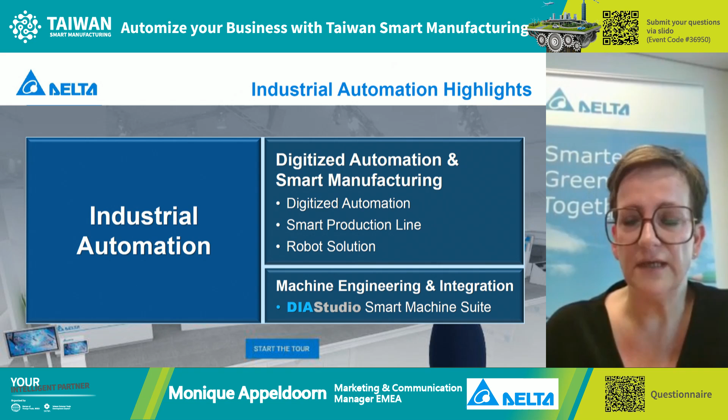The focus of industrial automation this year is digitized automation, smart manufacturing, and machine engineering and integration.

In digitized automation, Delta is proud to offer a complete management software package that allows you to manage your factory floors and be a smart manufacturer in the ever-changing world today.

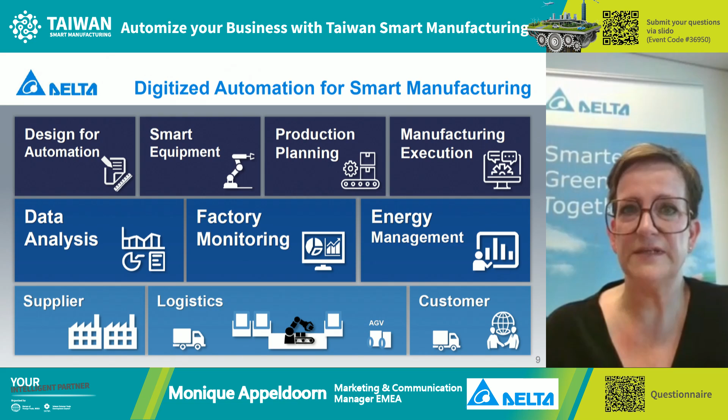As you can see here, we have design for automation, smart equipment, production planning, and manufacturing execution. So basically, from the factory floor all the way up to the management of the factory, we can help you manage this.

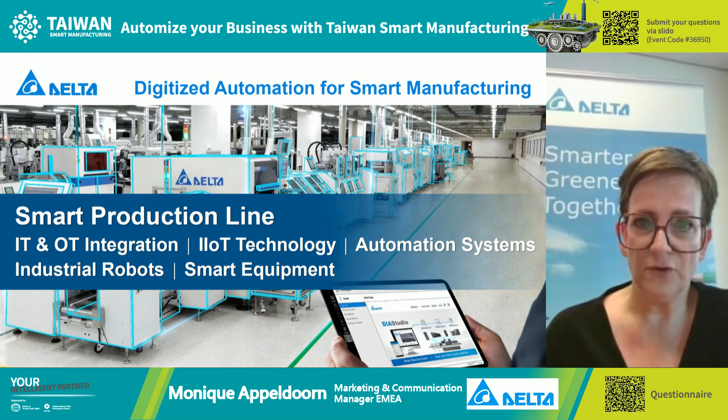In Digitized for Smart Manufacturing, we offer smart production lines, industrial Internet of Things, automation systems, industrial robots, and smart equipment.

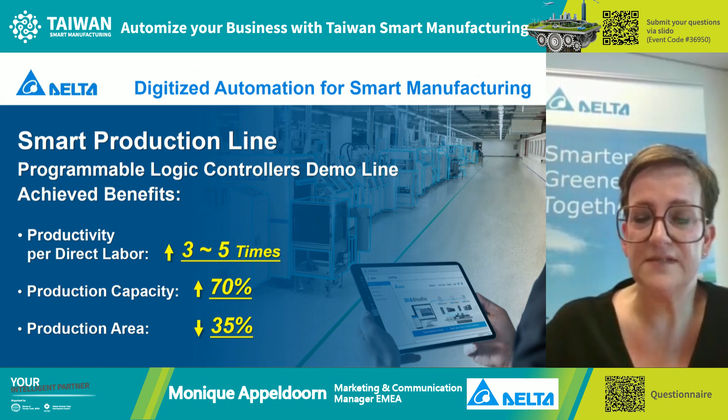In smart production line, we are looking at the smart production line in the Wujiang factory floor. This is one of our own factories in China, where we've implemented our software as well as our hardware to make a smart production line. By doing this, we've increased productivity per direct labor 3 to 5 times, increased production capacity up to 70%, and decreased the production area.

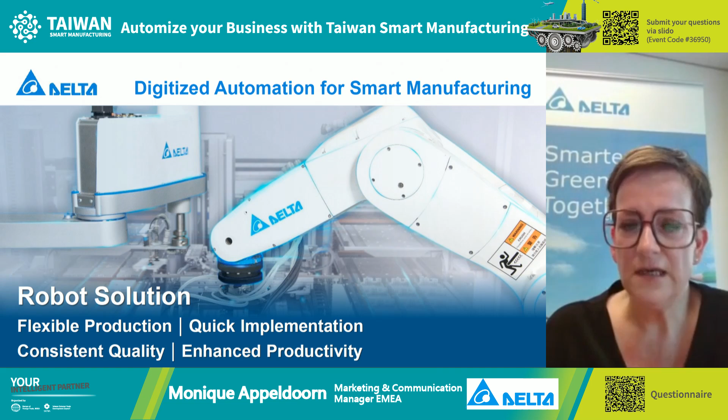Of course, in smart manufacturing, you cannot think of smart manufacturing without robotics today. What are the advantages of robotics? It's flexible production, quick implementation, consistent quality, and enhanced productivity.

The last focus that we have at Hanover Messe this year will be the launch of the DIA Studio Smart Machine Suite. It consists of 3 packets of software: DIA Selector, DIA Designer, and DIA Screen. The big benefits of the Smart Machine Suite are reduced commissioning time and faster integration, and basically you can tell your hardware what you want it to do for your machine.

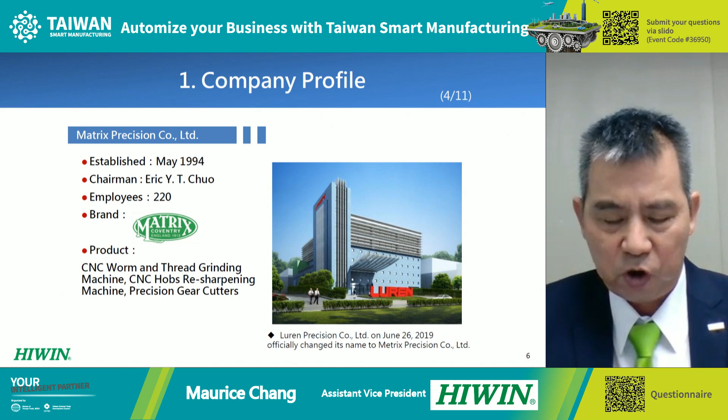All HIWIN's factories are located in Taiwan. We have 7 factories, with all key components being manufactured in Taiwan.

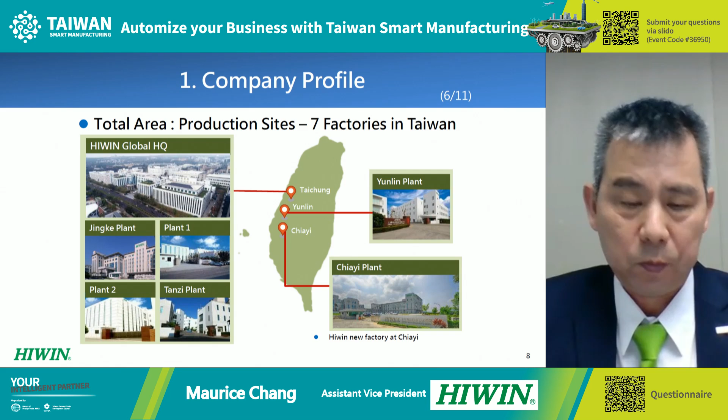HIWIN also has a global network, having 12 subsidiaries and distribution channels in more than 50 countries globally.

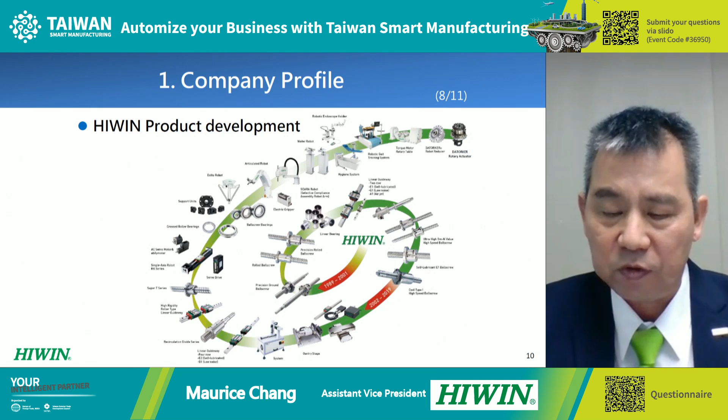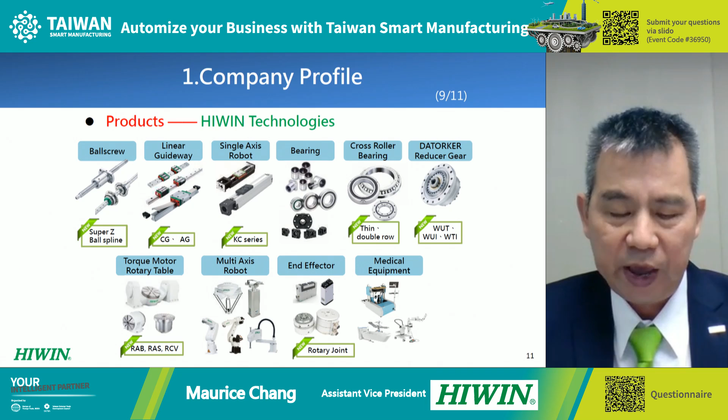Here you can see the full range of HIWIN's products, which includes ball screws, linear guideways, single-axis robots, bearings, cross-roller bearings, DATORKER gear reducers, torque motor rotary tables, multi-axis robots, end effectors, and medical robots.

HIWIN Mikrosystem's range is displayed here. It includes AC servo motors, drives, linear motor stages, torque motors, goniometer stages, Abilymotors, position measuring systems, and linear actuators.

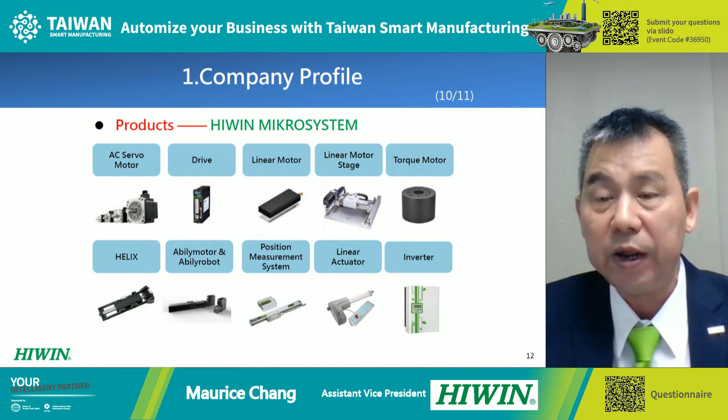Some of our best achievements include HIWIN being currently #2 globally in both ball screw and linear guideway manufacturing. We are also one of only 2 manufacturers in Asia for torque motors, and the only company that combines motion control components with electrical components to complete total solutions for our customers. HIWIN is also the largest semiconductor coordinate robot supplier, and the top 3 semiconductor equipment manufacturers in the world are HIWIN's key customers.

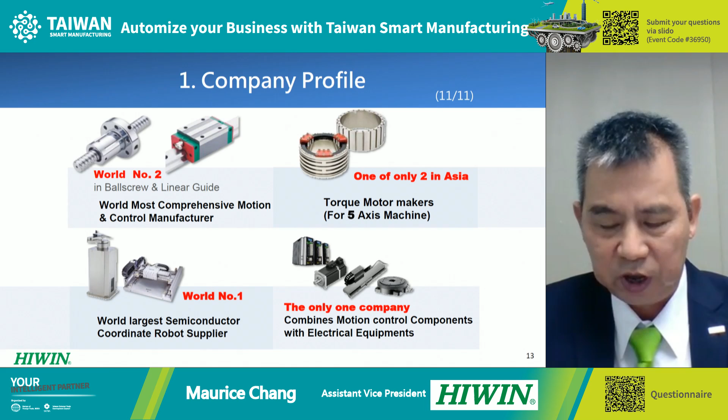HIWIN's outstanding performance has been recognized by the global media as we ranked number 16 in the Nikkei Business Asia 300 Power Performers in 2019. HIWIN was also ranked in Forbes Asia's 200 Best Under A Billion company listing last year.

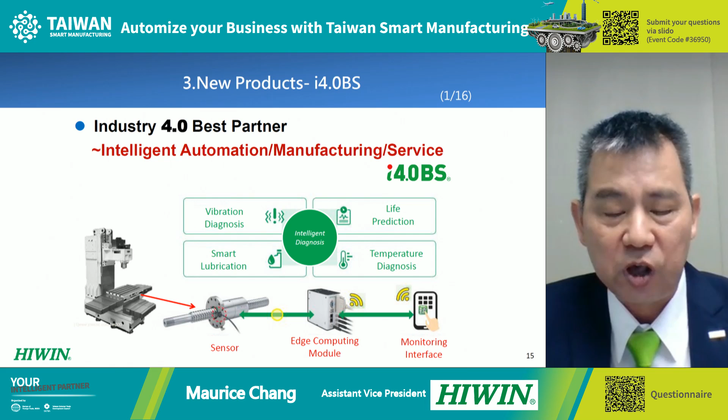HIWIN has a constant focus on smart manufacturing, and we have collaborated with universities in Taiwan and abroad to develop the next generation i4.0 ball screw. With a specially developed sensor and edge computing technology, the i4.0 ball screw can pre-diagnose the vibration, lubrication, temperature, and preload of the ball screw in precision machinery. It is also capable of sending feedback to operators and managers by computer or smartphone to prevent unexpected machine shutdown, thereby improving productivity and reliability.

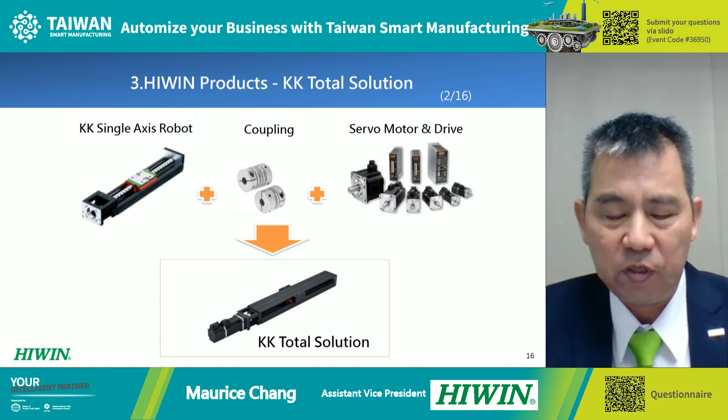Next, we will be introducing some of HIWIN's total solution products, which are the core strengths and add value to our customers. The KK total solution consists of our KK single-axis robot, coupling, servo motor, and drive. Customers receive total solutions for their automation—they just need to plug and play instead of looking for different suppliers for different parts and having the hassle of installing them themselves.

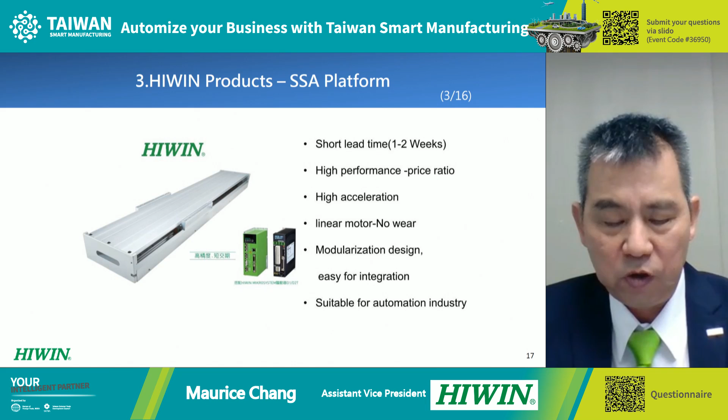This page shows the SSA platform, which is a total solution stage using our linear motor technology. It offers high speed and high accuracy.

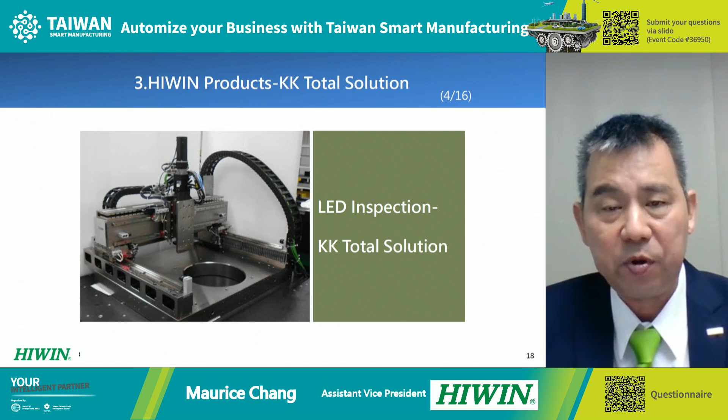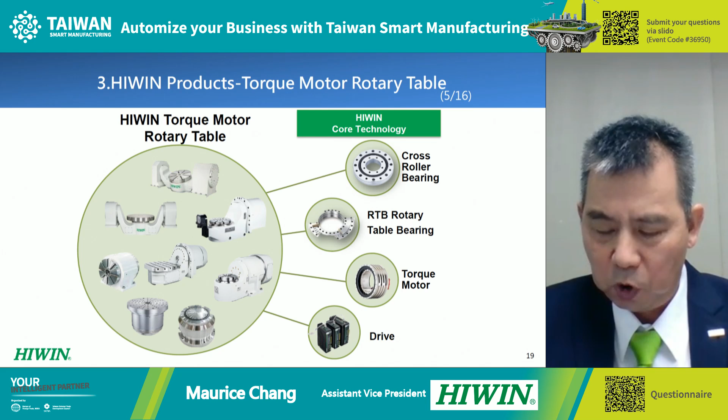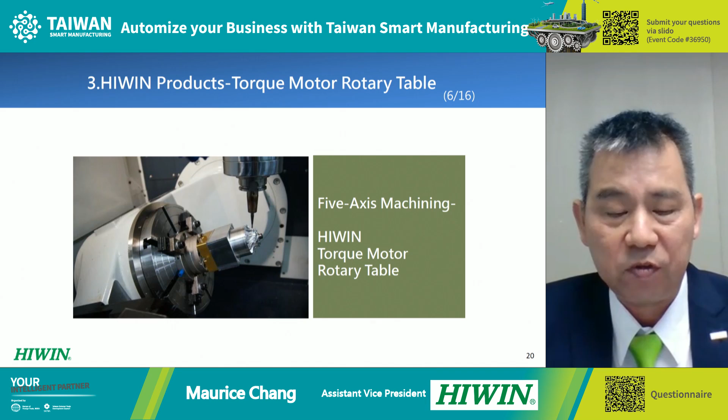This is an example of a precision 5-axis machine using HIWIN's torque motor rotary table to produce turbines for automotive parts. The torque motor rotary table also helps customers increase the machine's value-added function, upgrading from a 3-axis machine to 4 or 5-axis machines. This enables the production of more complicated and more precise components by a single machine.

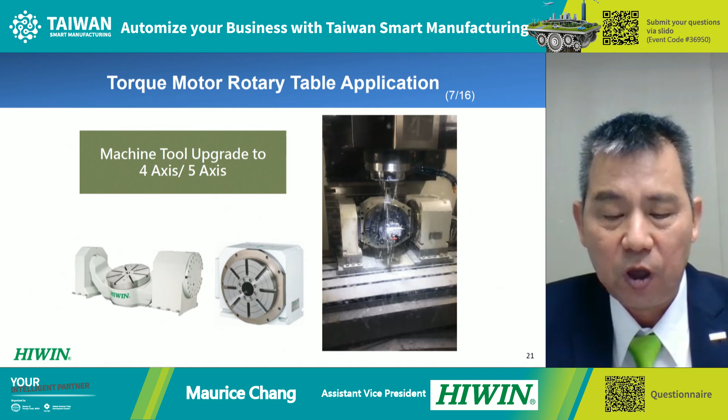Moving on to our robots, HIWIN has a wide range of robots, from the articulated robot to the SCARA robot for industry applications, to the Delta robot mainly used in the food and pharmaceutical industries, to wafer robots used in semiconductor industries. All the major components of the robots are manufactured solely by HIWIN.

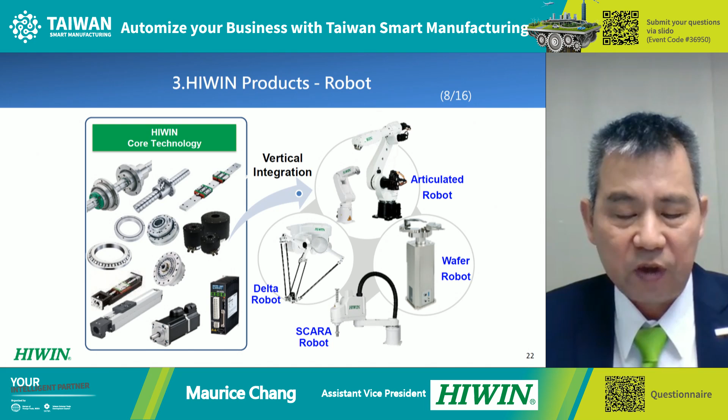Here is HIWIN's Delta robot installed for automatic labeling and pick and place in the food industry.

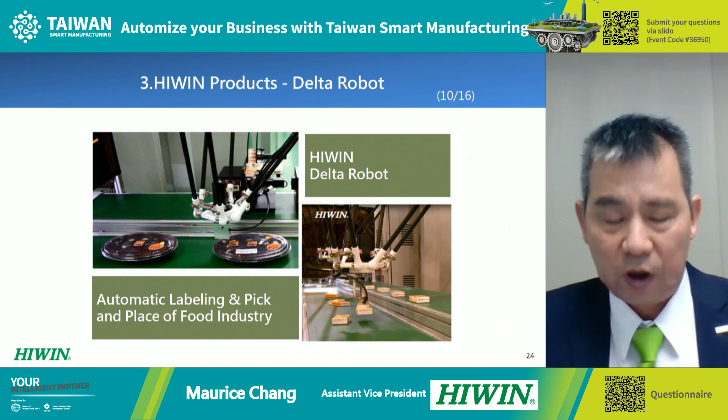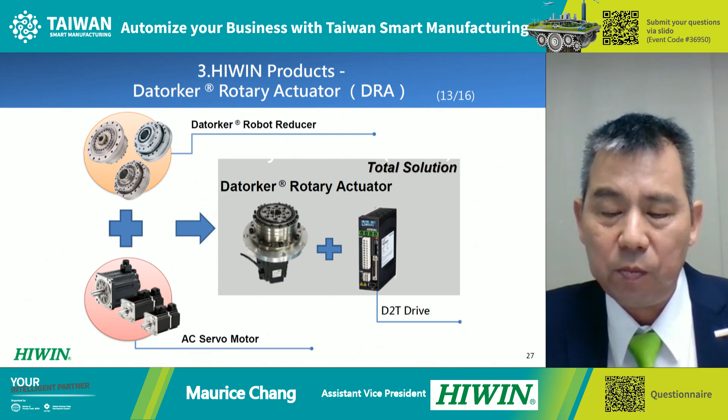The latest total solution product from HIWIN is the DRA Datorker rotary actuator. The Datorker is a high precision and compact gear reducer with a strong gear reduction ratio used in robots, high precision machinery, and indexing applications. Along with the servo motor and our D2T drive, we can offer customers an integrated precision product which, again, customers just need to plug and play.

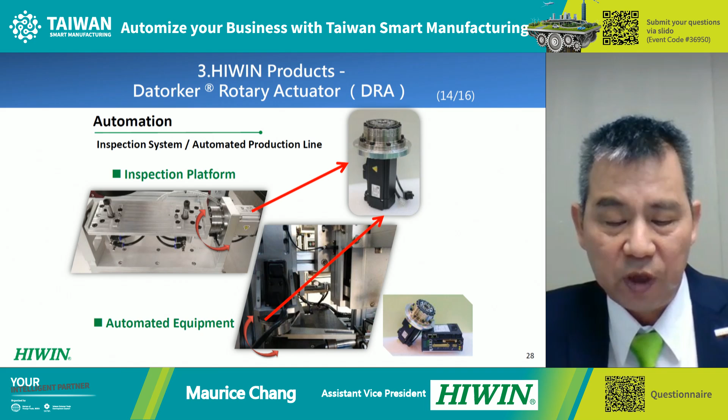Here you can see the applications of our DRA in in-process inspection platforms as well as automatic equipment.

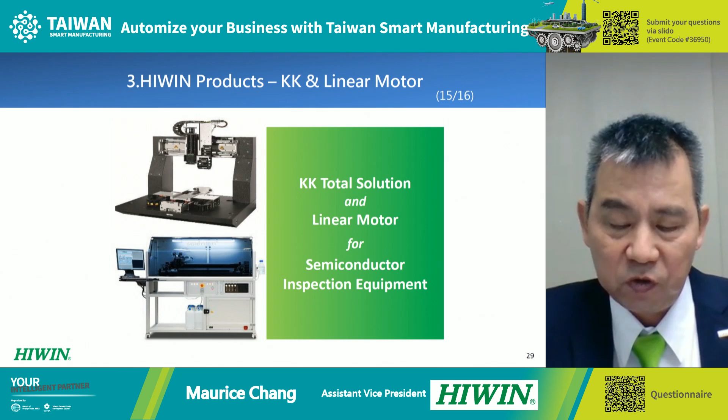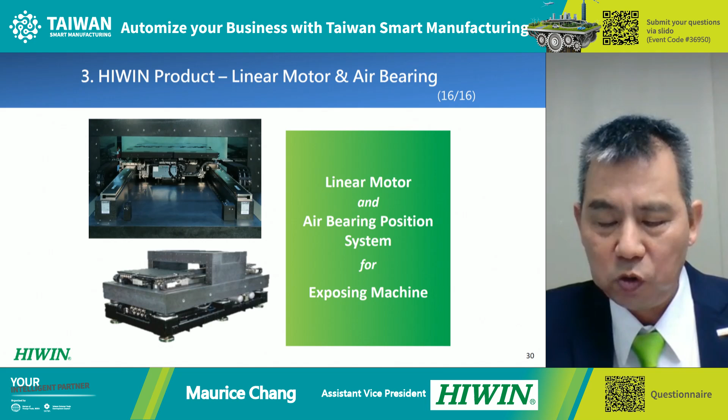Displayed here is HIWIN's KK Total Solution with HIWIN Microsystems' linear motor installed in semiconductor in-process inspection equipment. This application shows HIWIN's linear motor and HIWIN Microsystems' air bearing stage for the semiconductor exposing machine.

This concludes HIWIN's presentation today, and we'd like to thank everyone attending this online press conference. If anyone has any questions, please feel free to ask later on.

Thank you very much, Maurice. And as you have heard from Delta and also from HIWIN, they have many product lines. Today we know that we have to keep everything under 10 minutes, so everything sounds a little bit rushed.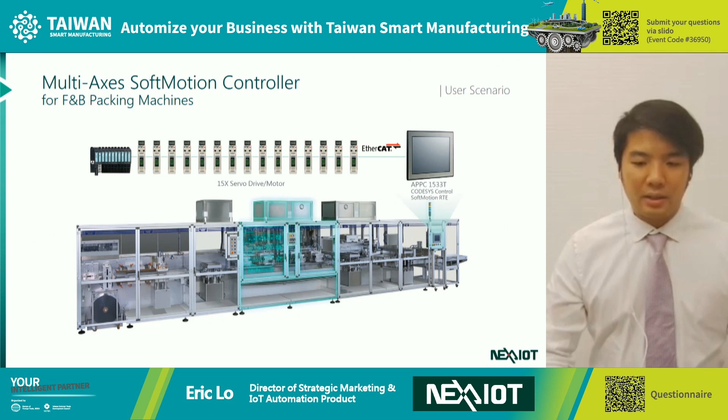The system architecture is quite simple. You have one panel PC installed with software called Codesys SoftMotion, which makes the panel PC a SoftMotion controller with HMI functionality to replace the traditional PLC and HMI. With EtherCAT technology, you can easily use a LAN cable to connect up to 15 axes of servo drives and motors and remote I/O with sensors included, so the system architecture becomes even more simplified.

Our SoftMotion controller offering includes one controller, panel PC or box IPC, installed with Codesys SoftMotion software inside as a SoftMotion controller. We also offer distributed I/O, providing comprehensive SoftMotion functions to the customer. It supports up to 255 motion axes, with distributed clock enabled for real-time control. Most importantly, the SoftMotion controller follows the PLCopen standards, motion control part 1, part 2, and part 4.

The next feature is that it's a high performance controller. The fast cycle time is within 50 microseconds, and the maximum task you can run is 100 tasks per cycle. It also supports Profinet, Ethernet IP, EtherCAT, and Modbus TCP protocols, so you can easily connect to Siemens servo drives and motors, Rockwell Automation's servo drives and motors, and even Beckhoff and Schneider's automation products. The OPC UA server is also available to connect to the SCADA system so the machine can be easily monitored remotely.

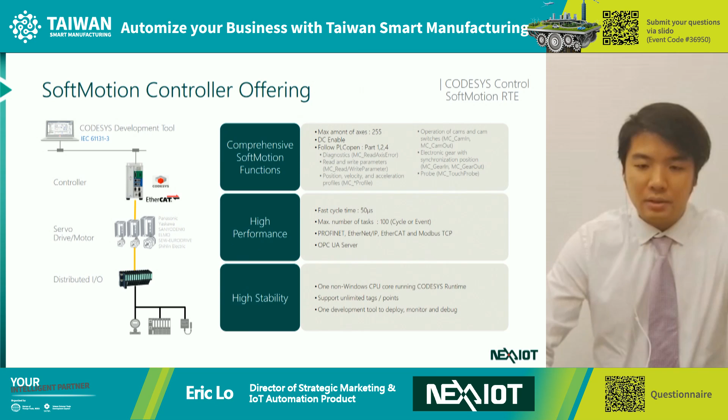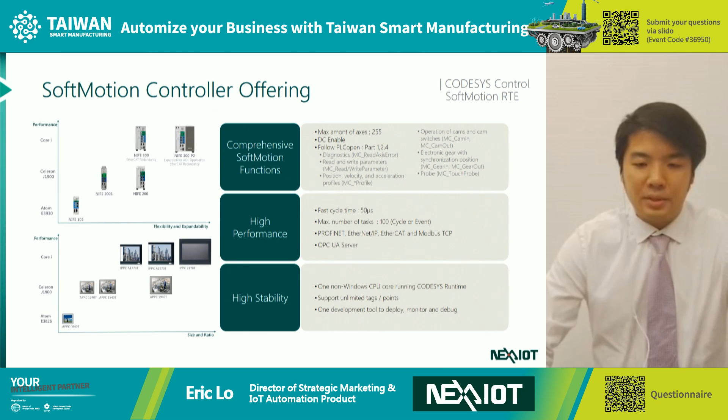We offer a panel PC product portfolio with sizes from 8-inch to 21-inch. We also offer box PCs, where you can choose from Atom CPU to Celeron CPU, and even high performance Core i CPU.

I will go through two successful stories. The first is metal sheet manufacturing. In the past, they used two PLCs and one small 7-inch HMI to construct their metal sheet machine. After we offered the 15-inch panel PC installed with Codesys and EtherCAT included, they achieved a product speed up to 70 meters per minute, enhancing production speed by 40%. They also simplified the system architecture from 2 PLCs and an HMI to an all-in-one panel PC controller.

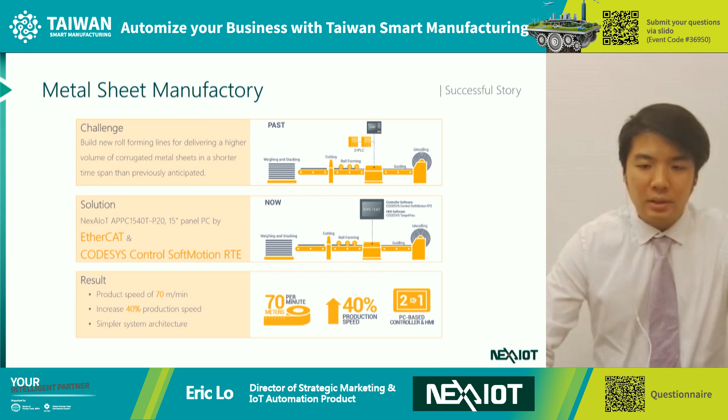The other successful story, as mentioned earlier, is a packing machine. In the past, the customer used CTNet to do the 15-axis SoftMotion control inside the food and beverage packing machine. But the control algorithm required programming 15 times because each servo drive and motor needed its own programming. Also, the synchronization was quite complicated.

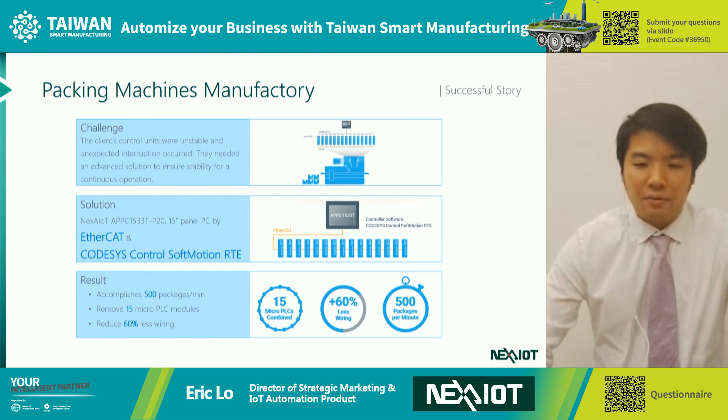But we offer PC-based automation solutions with a panel PC installed with Codesys and EtherCAT. They now just do one programming and simplify the system architecture with one LAN cable. This results in completing 500 packages per minute and removing 15 micro PLC modules and their programming. For the customer, they reduce 60% of wiring. So the total cost of ownership of the machine is cut down significantly, and productivity for the customers is increased.

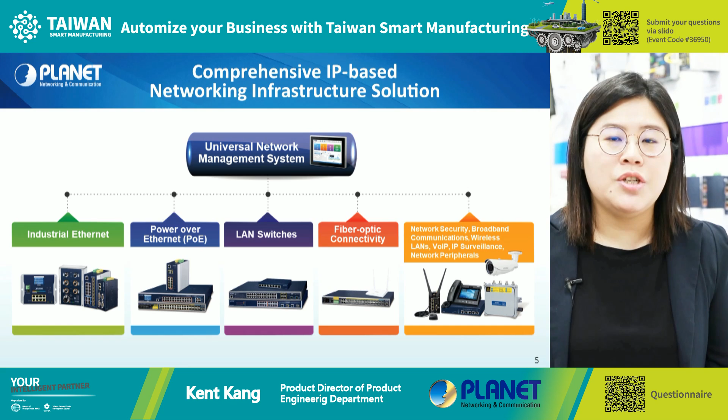All these network infrastructure devices are deployed everywhere in various markets, such as industrial applications like smart factory and IoV, as well as smart cities, telecoms, enterprises, and data centers.

Hi, I'm Kang, the Product Director of Planet Technology. Now I'm going to show you how Planet's innovative solutions can help automate your industrial network. Planet Industrial Ethernet Solutions consists of a complete product portfolio at the information, control, and device levels. It's highly reliable and secured. Products we design are compatible with many industrial protocols, such as Modbus TCP, EtherCAT, and MQTT, to ensure interoperability among all industrial devices, such as HMI and SCADA systems.

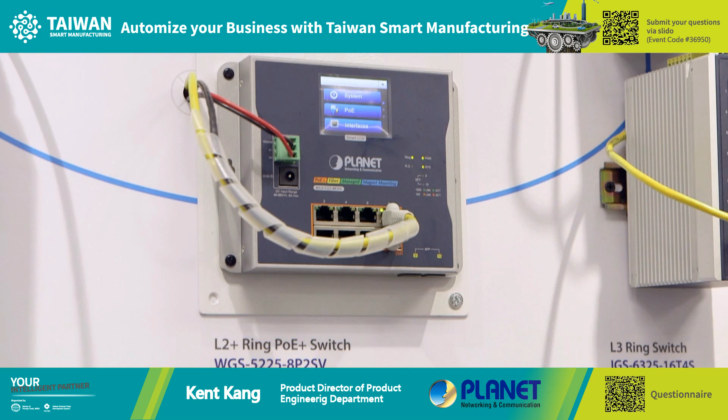Our devices help build connections via multiple media. High performance and security functions are also ensured, such as up to 100 gigabit connectivity, cybersecurity, flat type design, and long-reach transmission, and more. Planet provides multiple form factors to fit different environments and installation preferences. It's compact in size, fitting nicely in any environment, and the high-density features are perfect for various networks. The flat-type design can be installed in in-wall cabinets. The outdoor weatherproof and vibration-proof products are suitable for rail applications. With a wide operating temperature from -40 to 75 degrees Celsius, our products provide customers with stable data and power transmission.

One of our advantages is offering customized features to meet customers' requirements. This flat-type product is designed for customers to hide their Ethernet switches in the wall. Along with Planet's patented Touch LCD, the administrator can easily and quickly configure via user-friendly GUI interfaces.

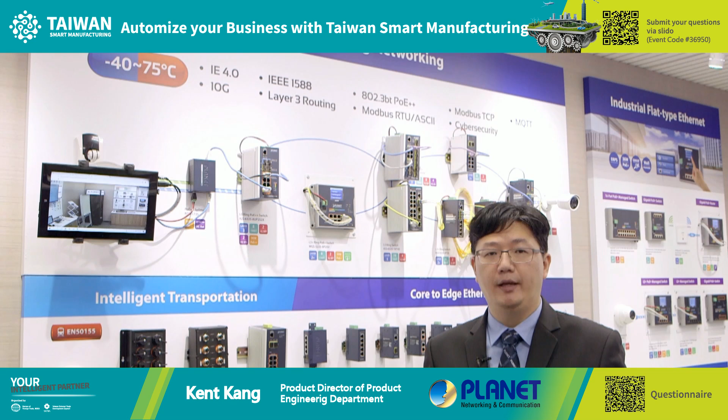In addition to the industrial application, many countries are now trying to deploy their 5G base station. The product I'm holding provides copper, fiber, and 10 gigabit interfaces. The 10 gigabit transmission speed is able to satisfy the high bandwidth demand of 5G. Our completed product lines are sure to solve all your applications' demands for data and power transmission via a simple cable line.

Next, you must have heard of Planet's famous power over Ethernet solutions. With one UTP cable, our product can deliver up to 95 watt 802.3 BT PoE++ for data and power transmission to devices like IPC, power system, healthcare, digital signage, and smart lighting. Except for standard UTP cable, we provide customers the ability to reuse their existing phone wire and coaxial cable to transmit data and power, and further extend the distance, saving customers time and money.

We provide a wide range of PoE products to suit different demands for all industrial environments. Also, with our unique intelligent PoE management functions, devices can be monitored, analyzed, and managed.

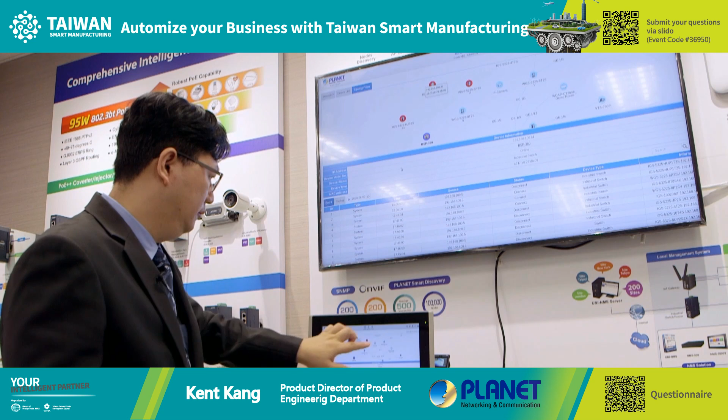Speaking of device management efficiency, Planet has specially developed the Universal Network Management System. All your wired and wireless networking devices can be centrally managed. As you can see here, with our unique Touch LCD designed Universal Network Management Controllers, network devices can automatically be discovered with the topology on the screen. It also features an easy-to-use dashboard, event report, and alarm to ensure the efficiency of your industrial network.

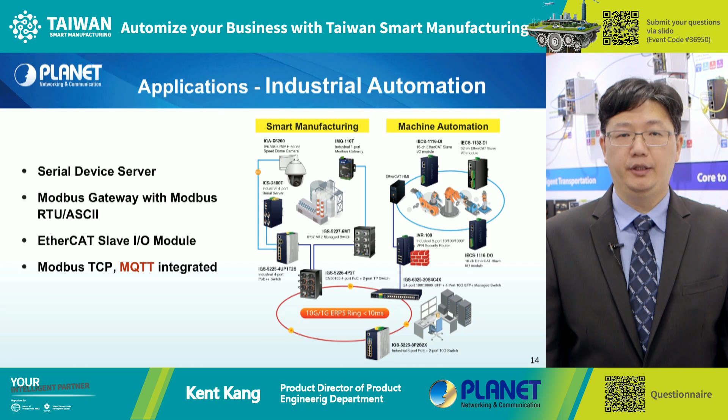Here is a Planet industrial automation application, which includes smart manufacturing and machine automation. Our industrial automation product line includes serial over Ethernet, Modbus TCP switch, and Modbus gateway, EtherCAT I/O modules, and serial over 4G LTE gateway, all designed to help realize IIoT-based connectivity.

Toyo is the largest single-axis aluminum extrusion electric actuator manufacturer in Taiwan and mainland China. I know that is a mouthful with a lot of adjectives in there, but think actuators with electric motors, not pneumatics, and also not steel body actuators that most linear bearing manufacturers make.

Toyo was founded in the year 2000 in Taiwan. Our factory is down south in Tainan, and our sales and technology center is up north in Hsinchu near Taipei. It's less than a 2-hour ride between them on the high-speed rail.

In June 2019, we opened our newest factory, which is about 20,000 square meters. That is our main manufacturing and assembly area. We also have a 6,600 square meter CNC shop next door. This new factory is 4 times the size of our previous factory. We also have land and plans to expand as needed.

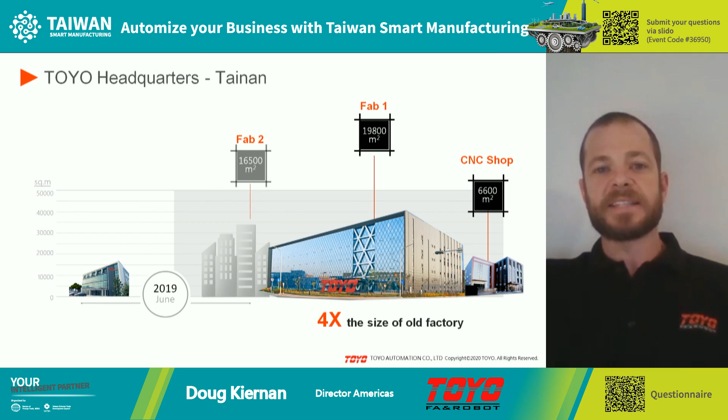This year, we are focusing on growing the Americas. I am very proud to be the first American employee joining Toyo late last year. However, I've been working with Toyo for almost 6 years, first as a manufacturer's rep and then as a sales manager for Toyo's first American distributor. I'm really excited to grow the business in the Americas, and Europe is not going to be far behind.

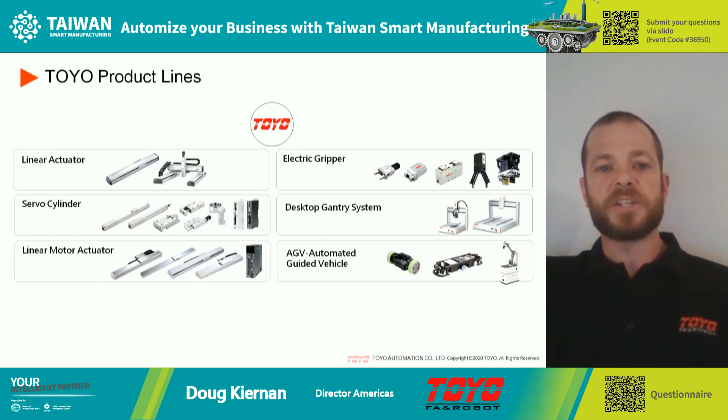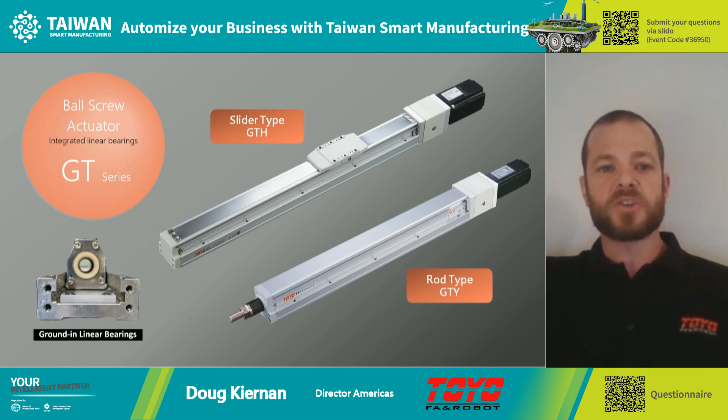Here is our GT actuator series. This is a very important product line for Toyo because it's the first product to use our integrated linear bearing technology. Look at the image in the lower left corner: we take an aluminum extrusion that is machined and precision milled, then we bond in the steel bearing raceways into the extrusion, and do a single pass grind on this body assembly.

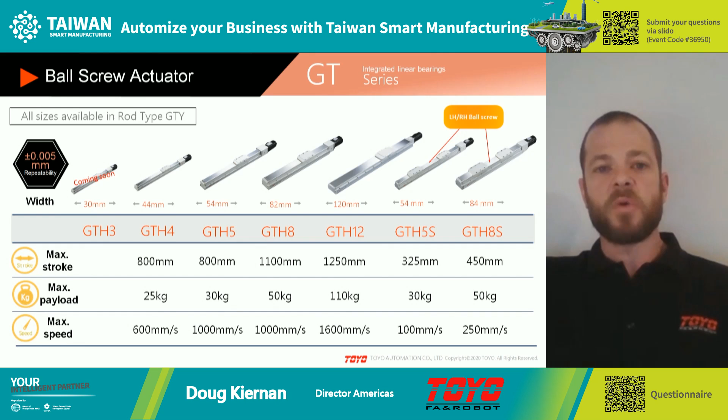Here are the 5 different GT frame sizes we currently have, from the GT3 at 30 millimeters wide up to the GT12 at 120 millimeters wide. We also have a left-hand, right-hand ball screw configuration for the GTH5 and GTH8, which can be used for alignment or a large gripper application. All sizes also have the GTY rod style actuator.

Here are the ball screw diameters and leads available. All of our ball screw actuators have a repeatability of plus or minus 5 microns using a C7 rolled ball screw. Our performance can easily be increased with a ground C5 ball screw.

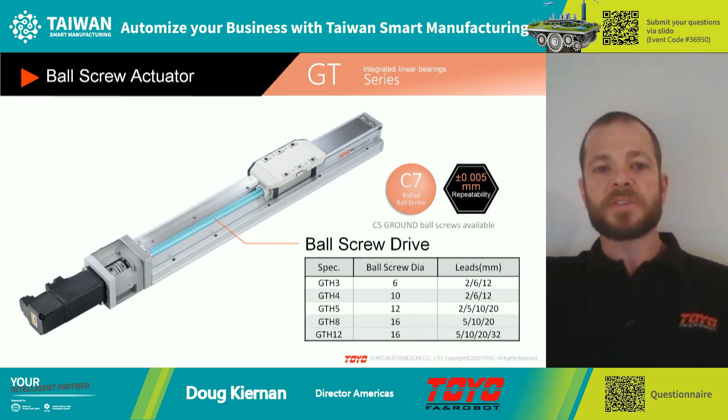All of our actuators are supplied with a motor mounting block and a coupling for our customer's selected motor. We also offer side or parallel mount motor configurations.

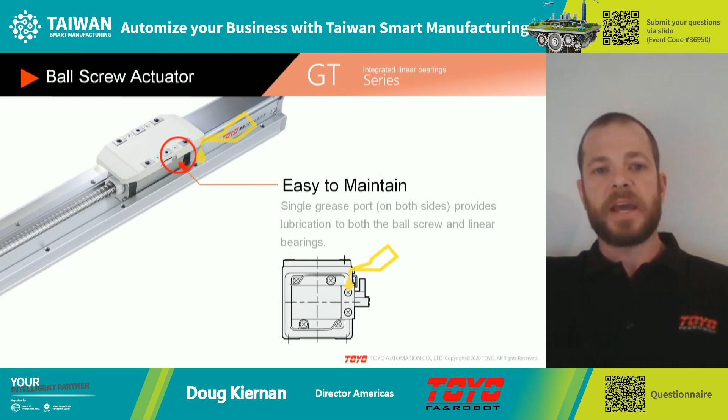This is a nice feature providing a single grease port that lubricates both the ball screw and the linear bearings. With our magnetically sealed actuators, we can add a pneumatic port—pull a little vacuum and it becomes Class 10 clean room rated. Conversely, add a little positive pressure in that pneumatic port and it does a really good job helping to keep dirt and debris out of the actuator.

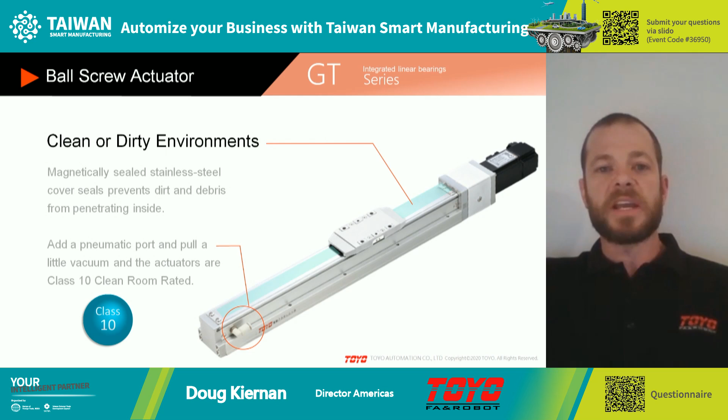The GT series has a lot of nice mounting features, starting with the option to mount from the top using through holes or from the bottom using tapped holes, both without having to remove any covers. All actuators also come standard with 3-pin locating holes and a reference edge.

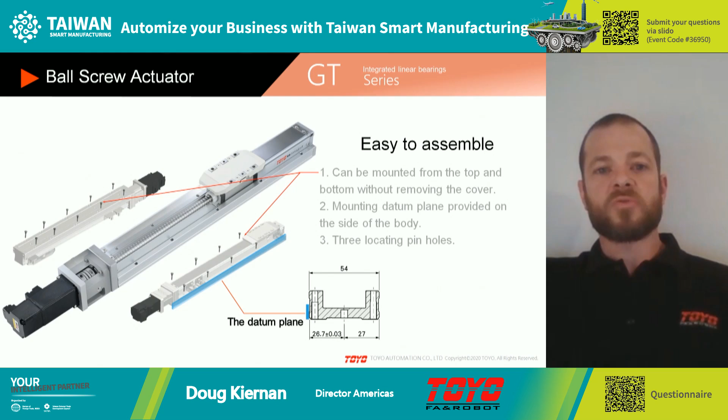Our single-pass grinding manufacturing process provides precision straightness and flatness of plus or minus 20 microns per meter. This is on par with or better than steel body actuators from some of our competitors.

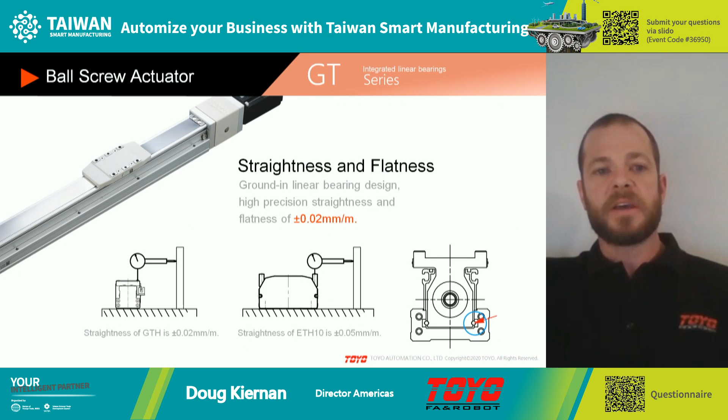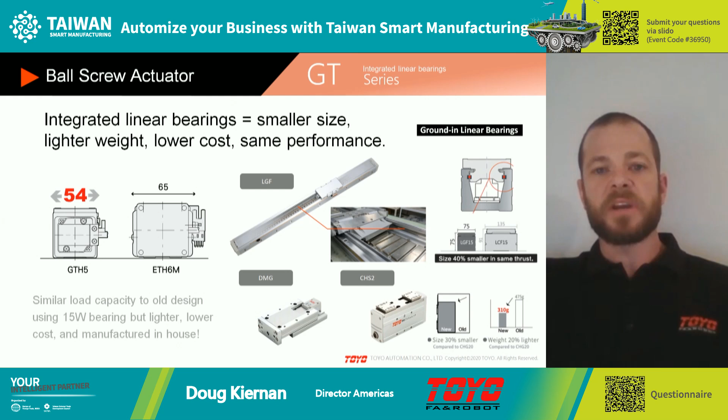This is a comparison showing our old ETH6 actuator that used a mini size 15 wide bearing compared to the GT5 actuator. We achieved similar bearing capacity and used the same ball screw in a much smaller package. Toyo is now using this technology across other product platforms, including grippers, linear motor actuators, and mini slide stages, all reducing size, weight, and cost.

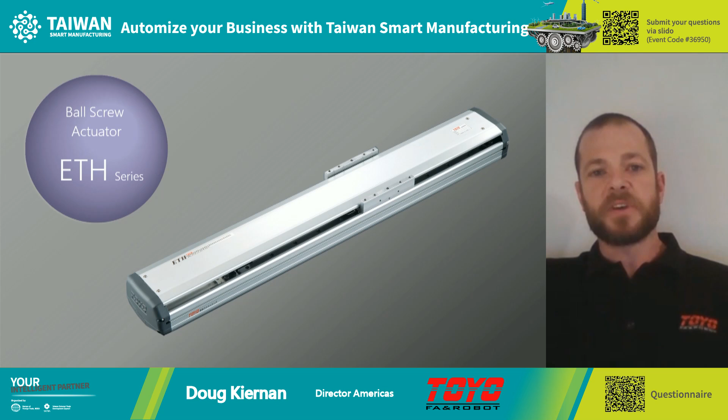Once we grow out of the GT series, we get into our ETH series, which is a common actuator configuration using 2 linear bearing rails with a ball screw down the middle. You can see our product range here, starting with size 13 bearings up to size 22 with similar size ball screws. For extra long strokes, we have traveling ball screw supports in the size 17 and 22.

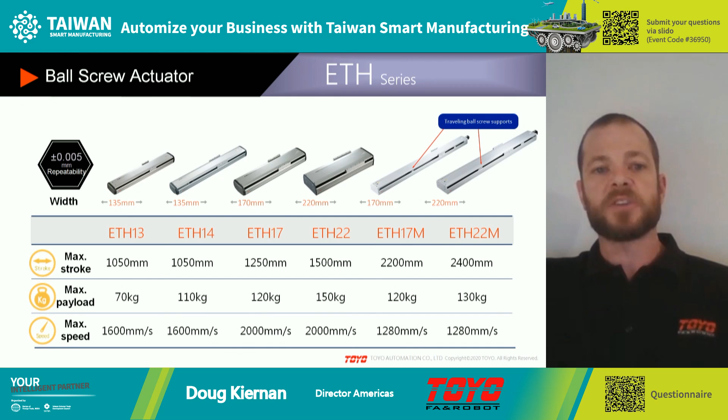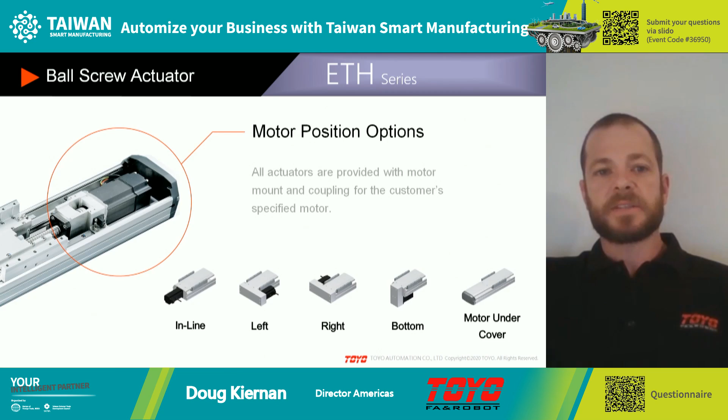Here are the leads for these different actuators. Of course, ground ball screws are available. Again, different motor mounts, this time adding the motor undercover option. With different drive configurations, we offer dual ball screws, left-hand right-hand ball screws, and extended carriages.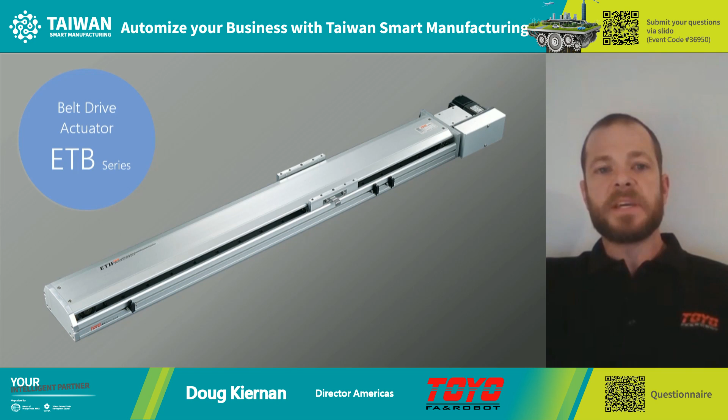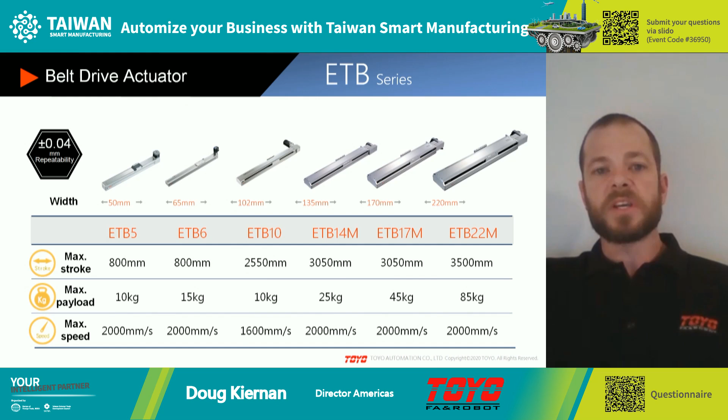ETB is our belt drive series. Here's the belt drive product family, starting with the smaller 5 and 6 that use the mini bearings, up to the size 22 that uses size 25 linear bearing rails. We offer 2 belt types depending on your application.

Different motor positions are available. On the 3 larger size actuators, we offer standard 2.5 to 1 pulley reductions to help with inertia matching. Gearboxes are also a standard option.

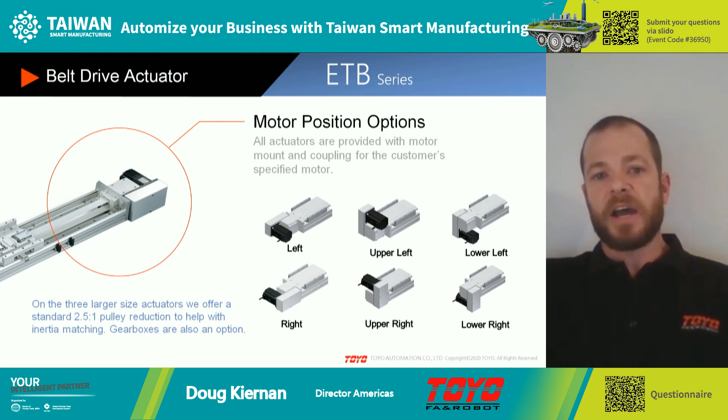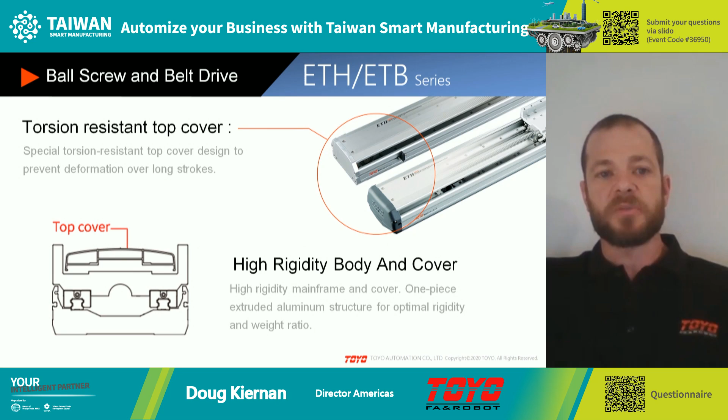The next few slides are some features offered for both our ETH ball screw and our ETB belt drive actuators. Here's our lightweight extruded torsion resistant cover.

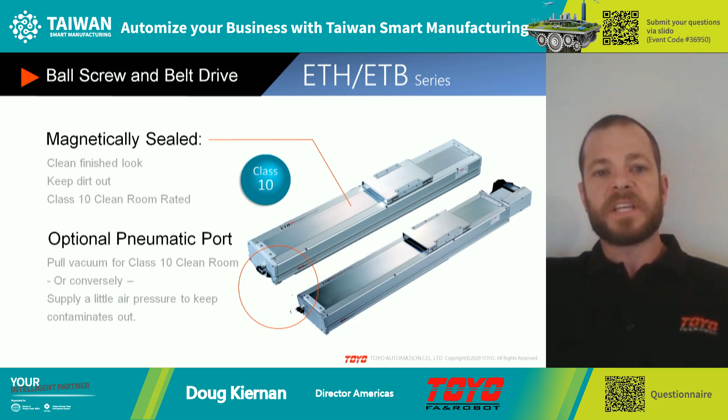Here are our magnetically sealed cover options, Class 10 clean room rated, good for contaminated environments. They also look great with the motor undercover.

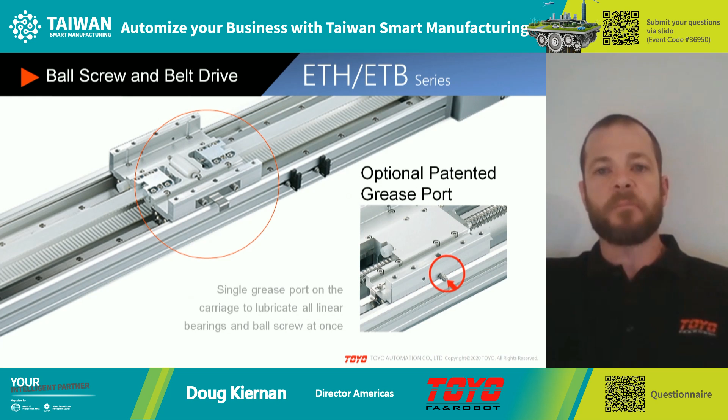Again, this very valuable single grease port option hits all of your bearings and ball screws without having to remove the cover.

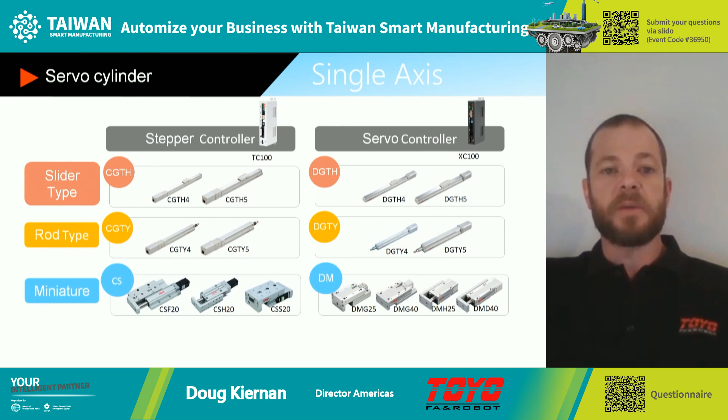Servo cylinder. This is our single axis controller, available on all the actuators shown here and more.

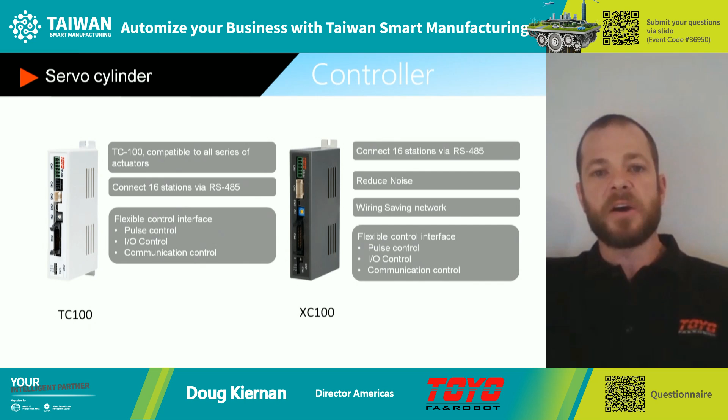TC and XC100 have a lot of nice features for a single axis controller. We provide 3 modes of operation: pulse, I/O, and communication.

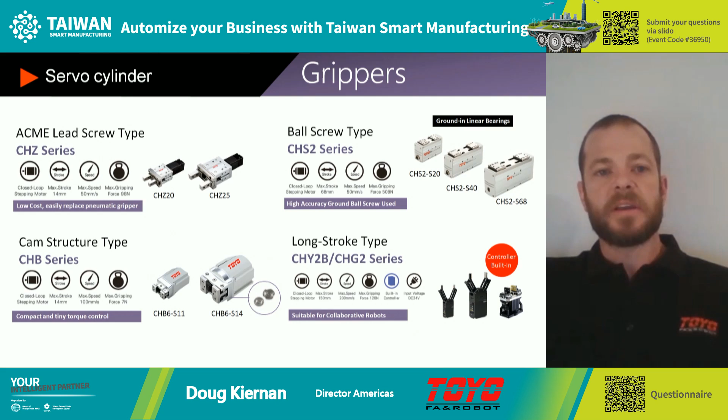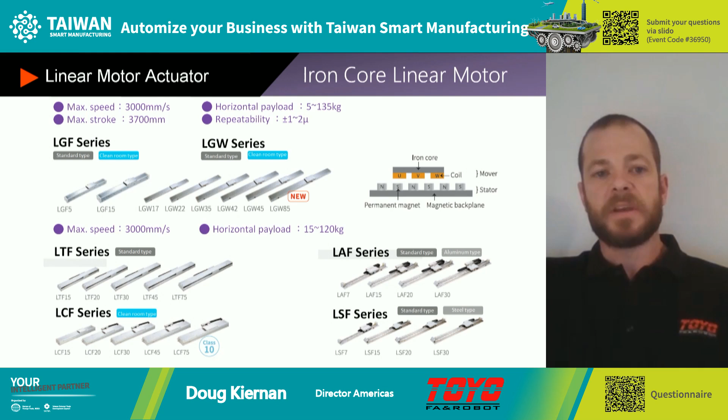For those applications that require it, we also have coreless linear motor actuators.

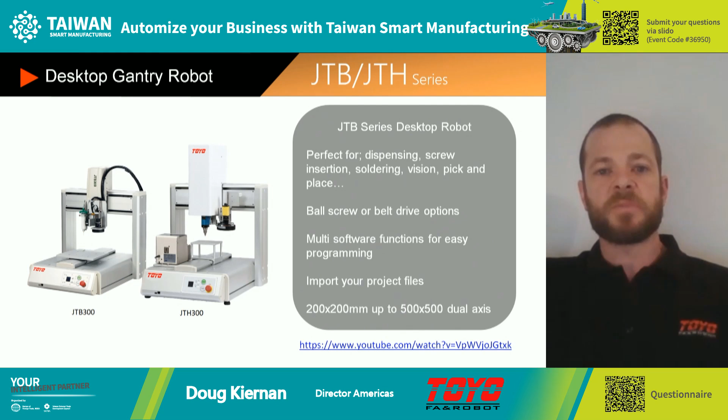Click this link to see an awesome 38-axis assembly machine using 100% Toyo actuators to get an idea of our capabilities.

Thank you for your time, and we look forward to working with you on your next automation project.